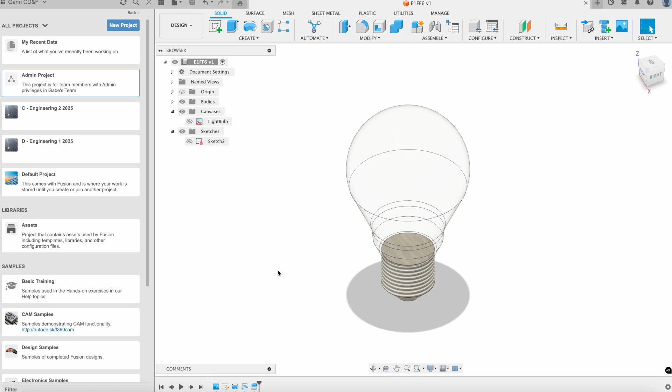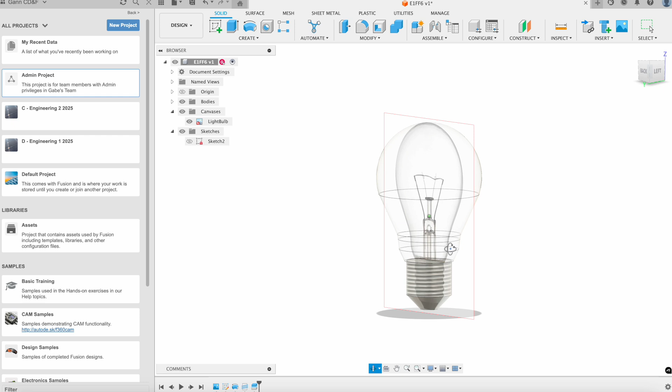Today we're going to learn how to use a couple different new tools in Fusion to model out this light bulb. We're going to use the Canvas tool, which creates almost a little template of what you want to create your solid 3D object out of, for you to easily reference and sketch. Then we're going to use a new tool up in the Create tab called the Revolve tool.

So in our new document, the first thing we want to do is insert a canvas. If you download the picture of the light bulb included in the OneNote, you can click Insert Canvas, insert from your computer, and open up our light bulb canvas.

I want to create a canvas on my front face, so if I place it right there, it will just place my light bulb canvas there. But we want to make sure that it's calibrated to the right height.

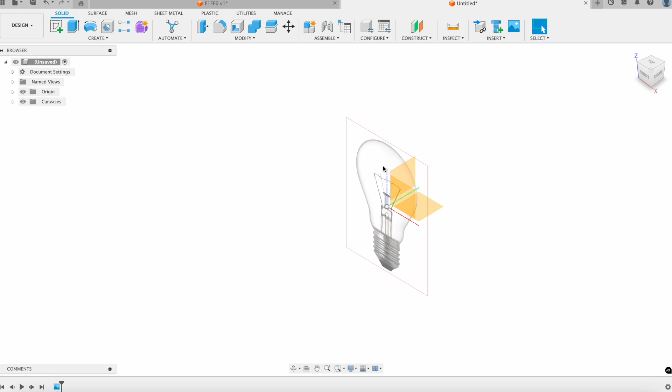So if we go into our canvas, we can right click on that light bulb canvas and click Calibrate. Looking at the front face of our picture, we can click on the bottom of our canvas and on the bottom of our light bulb and the top of our light bulb.

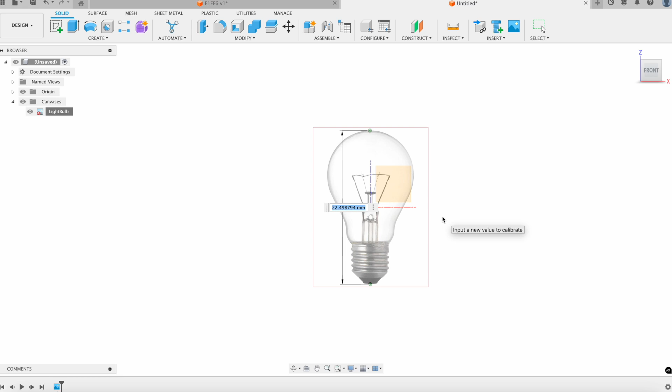Right now it's set to about 22 millimeters, but a typical light bulb height is about 100 millimeters, so we'll type 100. Now you'll see our canvas blows up and becomes very large.

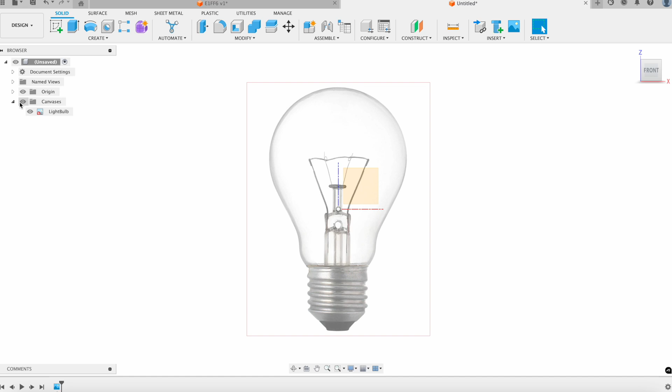Last thing I want to do before I start sketching is align the bottom of my light bulb up with my origin as closely as possible. This isn't necessary, but it helps make dimensions sketched a whole lot easier. So I'm just going to drag it up a little bit, and now the bottom of my light bulb is pretty in line with my origin. So I'll click OK.

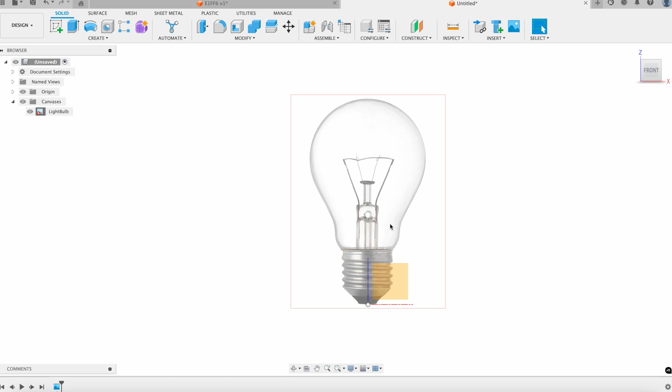Now I have this canvas that I can use as a guide when creating my sketch. I'll go into Create Sketch and create a sketch right on that same face. Now I can hide my origin so it's not in my way.

I want to start with a line that just goes from the bottom and then straight up to the top of my light bulb. It's 100 millimeters, and I'll click OK.

You always want to have, whenever we use the revolve feature, a line that goes from the bottom to the very top of whatever shape you're trying to create. I'll give that line a dimension so Fusion thinks it's fully constrained, and I'll open down my sketch menu to check when things are fully constrained and when they're not.

Now I'll start with that general shape, so I'll start with a circle. I'll just make it any dimension for now. You'll see that it's close, but it's not quite there.

So I can take this shape and make it a little bit larger. That's the nice thing about having your sketches unconstrained for the meantime — you can click, hold on that line, and expand it out to the place you want it to be. That looks pretty good.

So now I can give my circle some dimensions. I'll give it a dimension of 58, and now you'll see this sketch is fully constrained. Now I'll continue this process.

What I'm going to do is start by just getting my shape. I'm not going to add in my dimensions yet, but I'll take the line tool and sort of outline the general shape of my light bulb. I'm going to skip these threads for now and come back to that later. We'll create our general shape, and now we have a fully closed shape.

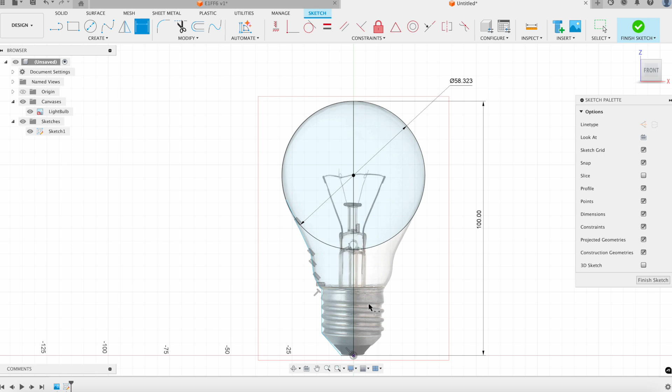Then I could go back and add in some dimensions, and see where I need to add the dimensions by clicking and dragging. I know I'll need to add a tangent constraint to this line here — I want that to be tangent with my circle — and then I should just need to give it some dimensions from the points to my origin.

Now that becomes fully constrained, and then I'll just continue that process. It's really helpful if you add the constraints to your origin, because then you could just click, drag, and add in any dimensions that you need to.

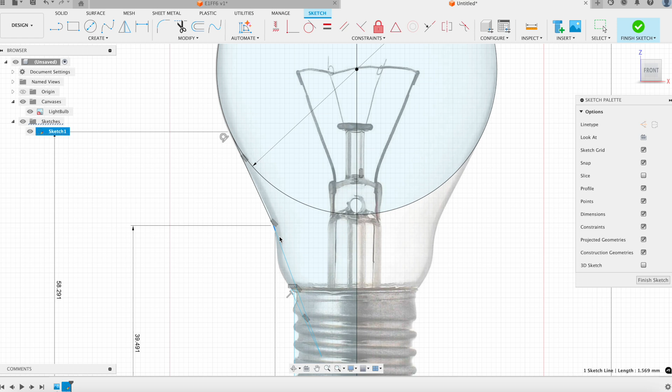So this line is still not dimensioned, so to check where, I could click and drag it, and I see that it's kind of swaying from the top. It looks like my top point is able to rotate. So I'm going to undo that, and then add a dimension from the top to the bottom.

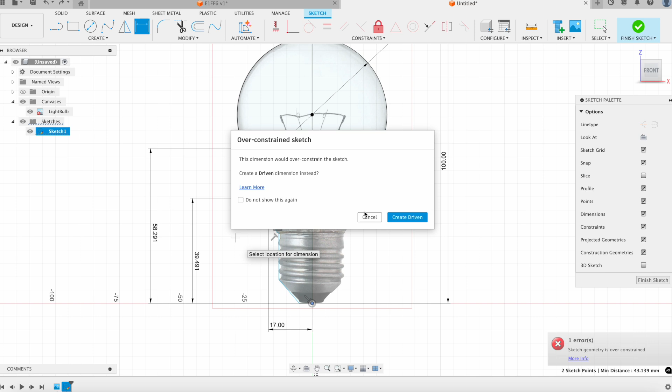And it seems that's over constrained, so maybe that's not actually my point. Maybe I need to give it a length. There we go. Now I give it a length, and now my dimension is fully constrained. So it takes a little trial and error to figure out where your dimensions are and are not constrained in this process. But once you do that, you could get the shape of your light bulb locked down and unable to be changed from this position.

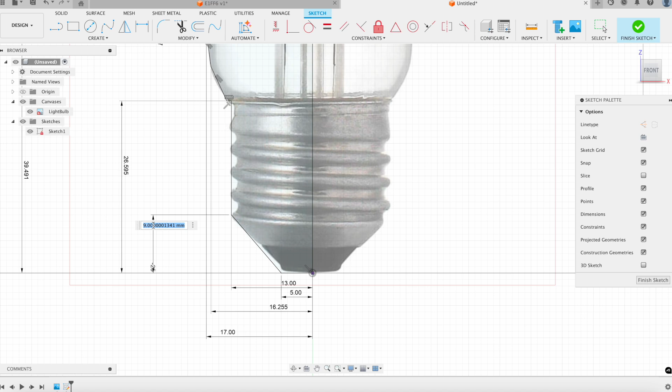So we'll see, we're still working down the line. We've still got this last little guy that is unconstrained. And it seems that it would be unconstrained from right here. But it also might need to be constrained like that. There we go. Now I have a fully constrained sketch of my light bulb, which is great.

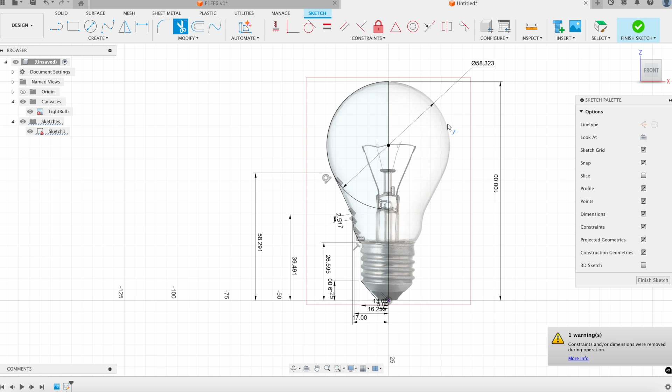The only thing I want to do now is, with the revolve tool, we are only concerned with half of the shape of our light bulb. We don't want anything on this other half to do the revolve feature. So I'm going to grab my trim tool and just shave away that second half of the circle. Then I can go ahead and finish my sketch.

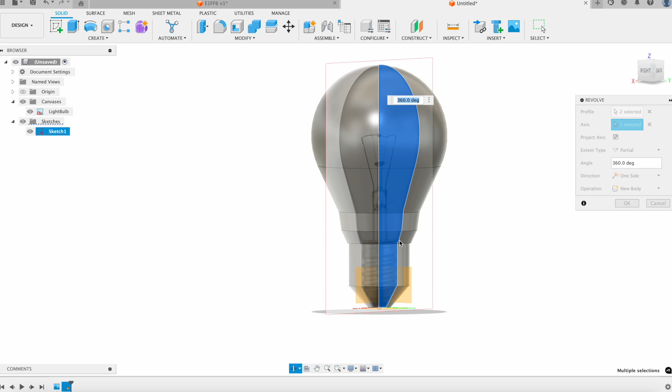And now that I have my sketch fully defined and ready to go, I can use the revolve tool. The way the revolve tool works is it takes a sketch you've defined and revolves it 360 degrees around any axis you choose. So if you click on the two objects in your sketch as your profile, and then for your axis select that middle line we drew that's 100 millimeters long, you'll see Fusion creates our kind of light bulb looking shape. We could go ahead and click OK.

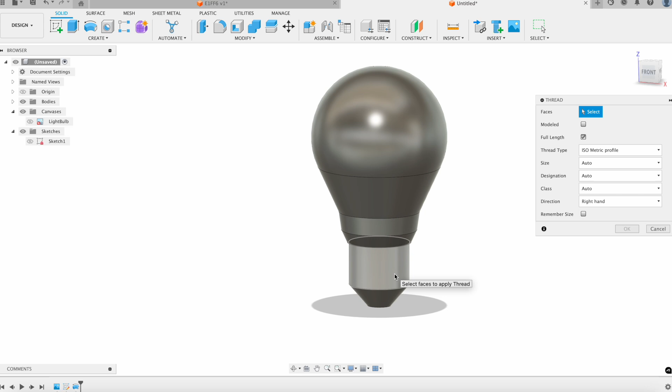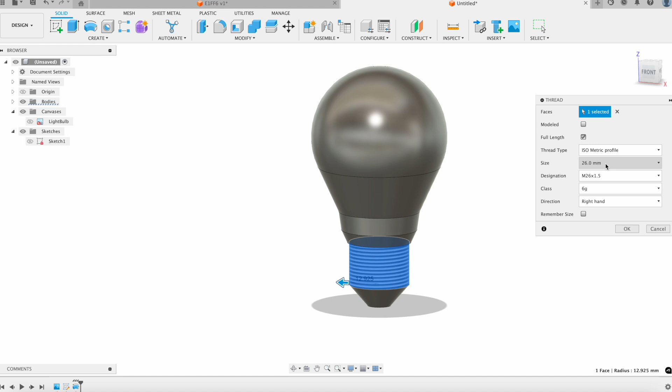And now if we hide our canvas, you'll see we have our light bulb looking shape. If you want to add more details, you can add some threads, and we'll put the thread tool just around this bottom portion. I'm not going to worry too much about the specifications for my light bulb, since this tutorial is mainly about a design feature inside of Fusion 360 instead of the technical specs. But if you needed specific threads, you could change the thread size based on whatever kind of thread and screw you need this light bulb to fit into.

So I'll go ahead and click OK for now. And now you'll see the threads are in our light bulb, which is great. Now we have a really nice light bulb looking solid.

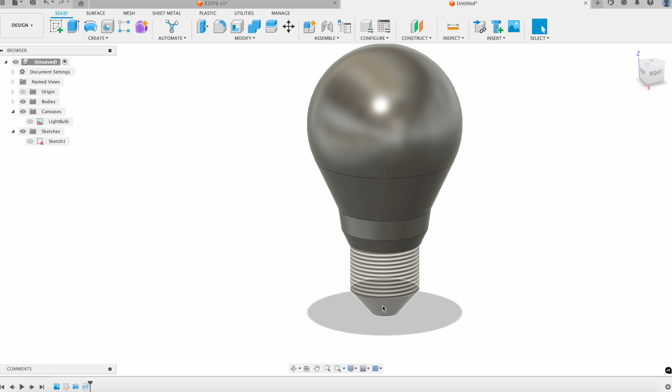The last thing I want to do is split this into two separate bodies. That way I can show that the top of the light bulb is glass and the bottom is the typical aluminum or brass or whatever material. So I'll go to Modify, and under Modify you'll see this Split Body command. I'll click that.

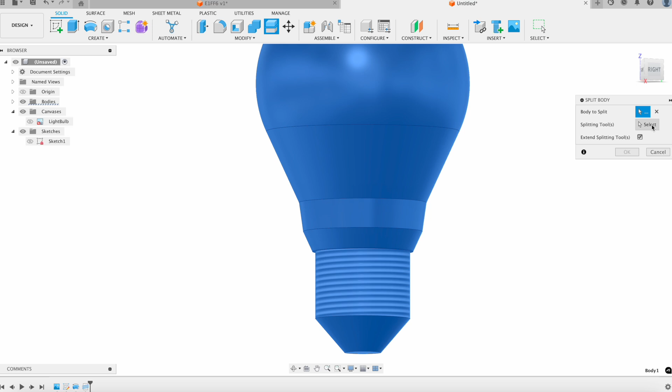What I want to do is split this body right down here, so that way I have two distinct bodies in my light bulb. So if I click on my body to split, I'll click on my whole light bulb, and for my splitting tool I just want to find a face right down here. You'll see that creates this little red circle, which tells us Fusion is going to split this light bulb along that face so that this becomes its own separate body and this becomes its own separate body. We'll click OK, and now if we open our bodies menu, we have two distinct bodies.

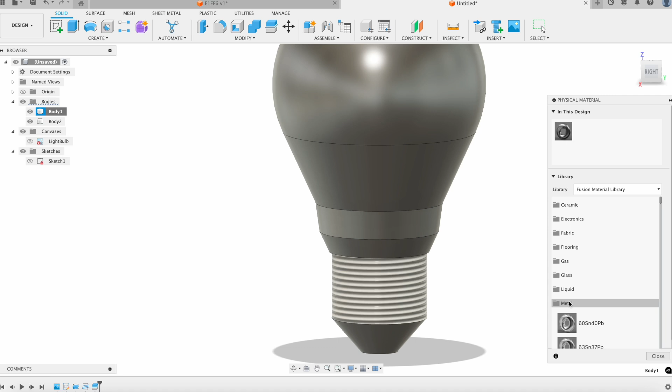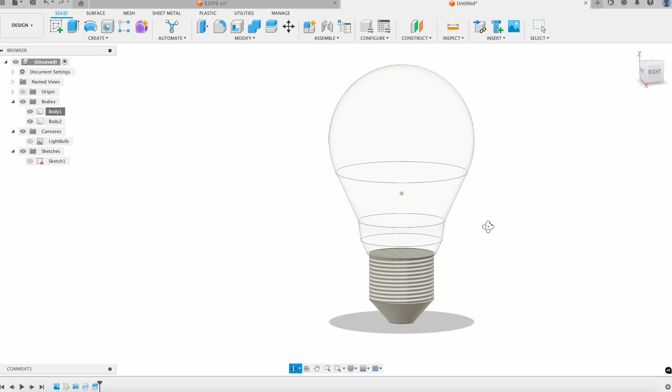Then we could go into our physical material and find some glass, and we'll make the top of our light bulb just regular old glass, and you'll see that makes it that kind of clear see-through color. And the bottom of our light bulb, we'll go ahead and make it aluminum. And then we'll close. That's how you can use the revolve feature and the canvas feature to create those kind of more complex rounded shapes.